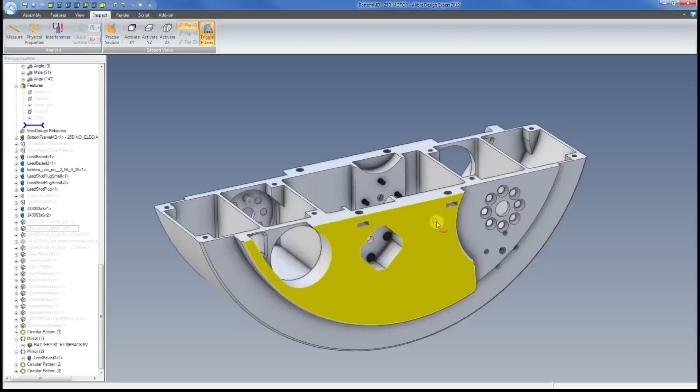This build is based on Michael Baddeley's 3D printed Dio design. I'm making tweaks and modifications of my own as I go along.

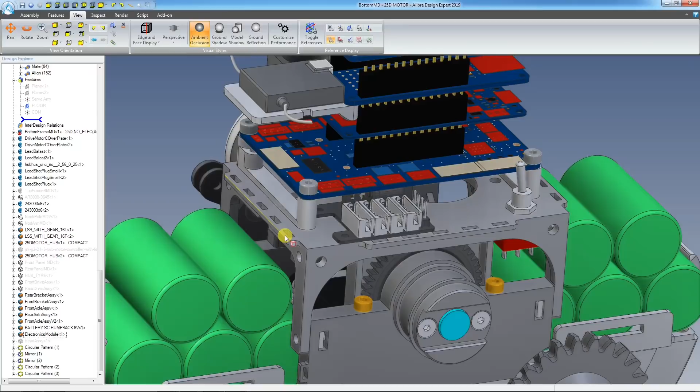So what I've been working on mostly is the deck itself. I've added all sorts of cable tie points along the sides just because I don't know my cable routing yet. I've also added this switch over here. This is a 6 amp toggle switch. I've added these little gear protectors inside. There you go, you can see that they cover the gears up so cables running through the middle there won't get pulled into them.

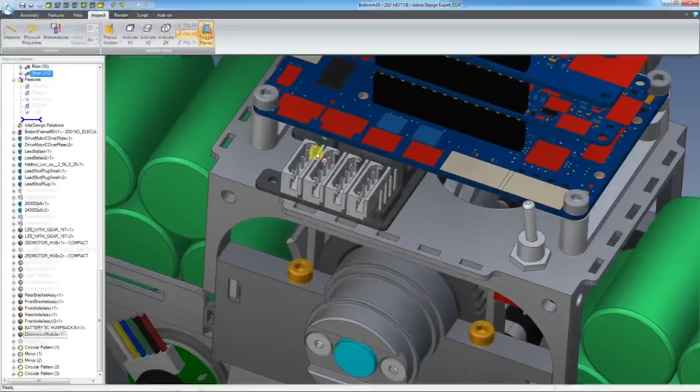This is a Lynxmotion power block, and it's basically 4 Molex connectors connected up in parallel. I don't really like these jack plugs, so I'm actually going to feed power directly from the batteries into the board, obviously via the switch. What I'm going to do is take one of them and supply power into the motor driver board, and the serial information will go up to the Arduino.

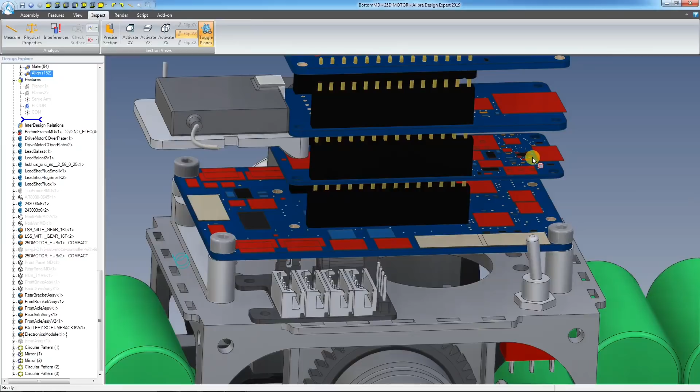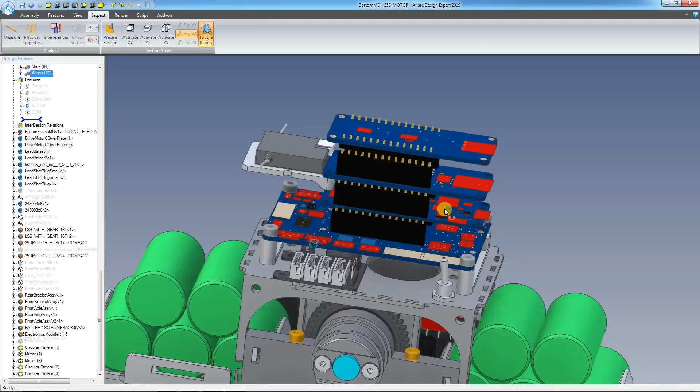2 of them at the back here will probably drive the LSS servos, which are down here. Final socket will go back down through the electronic stack here, and then down the axle, up the neck and into the head. I've made these little stands up here for the motor board to fit onto. On top of that we've got our Arduino, which is the MKR WiFi 1010 I think.

This was an SD card carrier, but I'm actually going to replace it just with a standard proto board, and that's so I can wire in like the serial data and plug in things like the Spektrum receiver, which is also serial based, which is why I made this little deck that's hanging off the side here to carry it. And then on top of that is our IMU. I have been playing around with this design down here, tweaking things as I go along, but nothing too major.

Let's take a look at this electronics deck. Here's the electronic stack carrier, and what I've got here is the battery harness here. So these basically are connected in series to take the 2 6-volt batteries into a 12-volt battery, and they're connected in series via the switch so you can power them on and off, so that breaks the circuit.

The other thing I might do is replace this jumper. I think this is a power jumper there. I might replace this with a fuse and put like an 8 amp thermal resettable fuse on there. I quite like to fuse things which have large batteries in. Here's the electronic stack in place. Everything apart from the proto board that's supposed to be sat under here.

I did fire this up the other day. This is the motor driver board. And they're designed to run off of a 3S LiPo, so that's about 11.1 volts, but they have a headroom of up to 12.6 volts. It does say that you're supposed to apply power to the board and then switch them on using this little switch. I was applying power from my PSU and switched on from the PSU, and this blew up. Now that was set at 12 volts. So I don't really see what the issue would be other than maybe a slight spike in voltage.

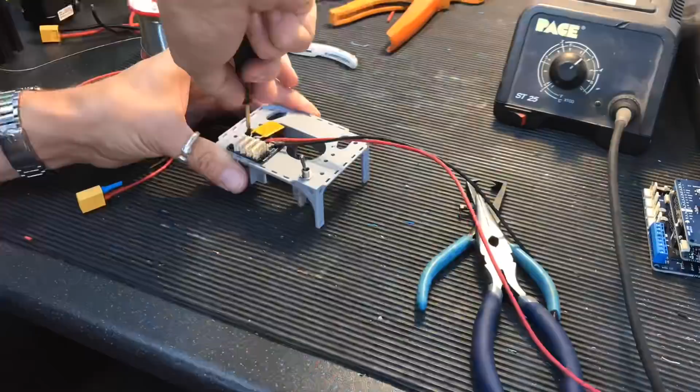It's not terribly encouraging, but the solution for me is to fit a DC-DC converter anyway, because I like to have a steady voltage. When these nickel metal hydrides come off charge, they'll be like 14 volts. That goes into the DC-DC converter, and that'll give me a steady 12 volts out. You'll notice during this series I won't be stopping to show you how to put together assemblies.

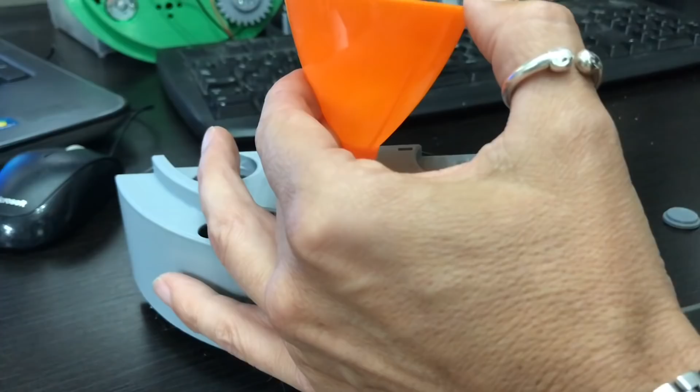I think the trip current's like 8 or 10 amps. The output of the switch harness goes into the input side of the DC-DC converter, and the output side of the DC-DC converter goes to the power distribution hub. I've reprinted this base with some of the changes that I've been making as I've been going along, and I've started to fill the lower chamber up with some lead shot.

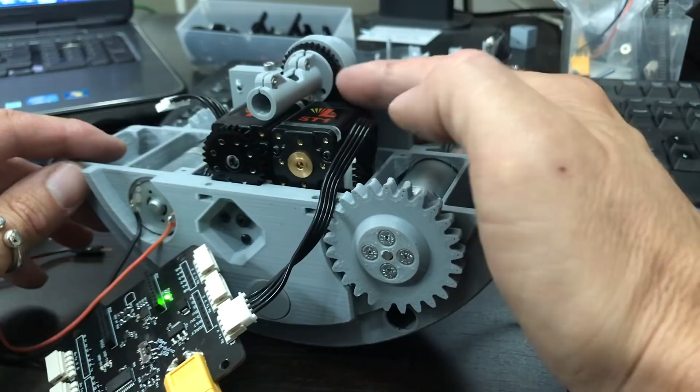While I was putting this base back together, I decided to switch out the 3:1 ratio gearbox on the Lynxmotion servo to the 1:1 ratio. So here's 45 degrees in one direction, that's pretty good, and 45 degrees in the opposite direction. Yeah, and that feels about like the speed it should be. Once that big long lever's on the end of it, I think that's pretty much spot on. So it's really handy that I could just switch that 3:1 for a 1:1 gearbox.

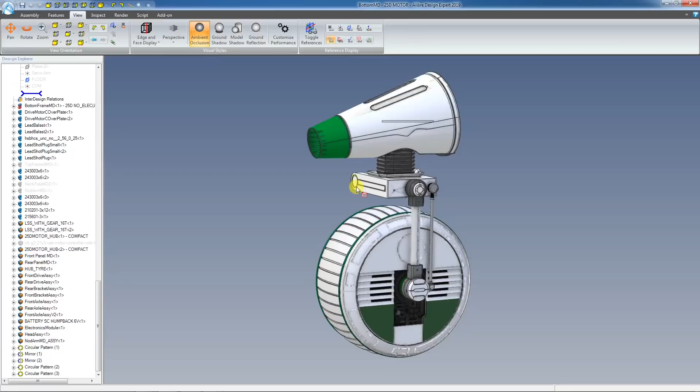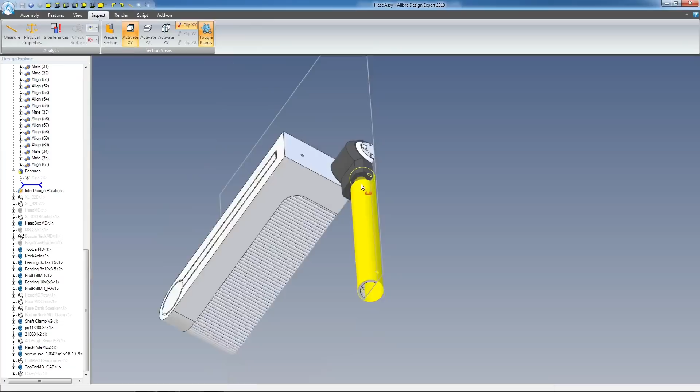Let's take a look at what I've been doing with the CAD model, and in particular the head. So you can see at the moment it's pretty much fully assembled, and I've spent quite a lot of time on the neck and head part of the model. So let's just take a closer look at that. This is the base of the head. So I've added more bearings and changed a few other bits and pieces. This is now an aluminium tube, and I found some tube which is 14mm in diameter, and I think there's a 1.5mm wall thickness. So it's pretty lightweight, but strong, of course.

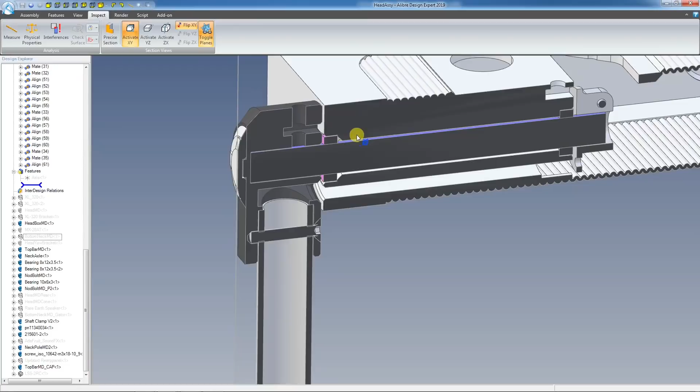I've changed quite a bit up here as well. Inside the main neck here, I've also gone again with my IGUS 8mm shaft. It's that nice hard anodized H8 IGUS axle. And then I've got a bearing at each end. So there's a bearing here and there's a bearing here. I've got a shaft clamp on the end here, and that's just to stop this from coming back out.

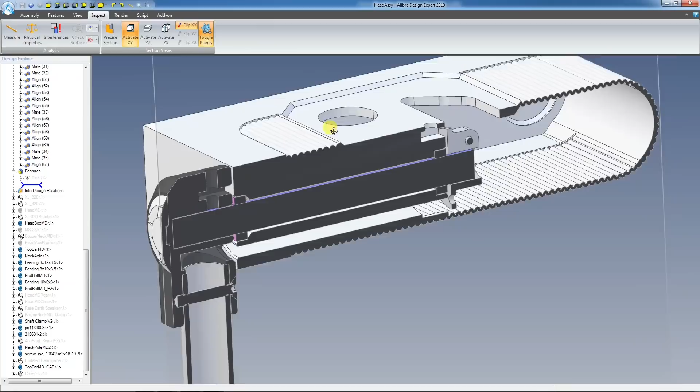Most of that head box is the same. There's a few little alterations, but not much. It's mostly to do with this part here. At the end of the neck tube where these two parts join, I have changed this part a little bit. It's just an 8mm hole for the axle to come into. I put an M3 nut in this space here, this cavity, which will have a grub screw going down just to hold on to the axle there, hold it in position.

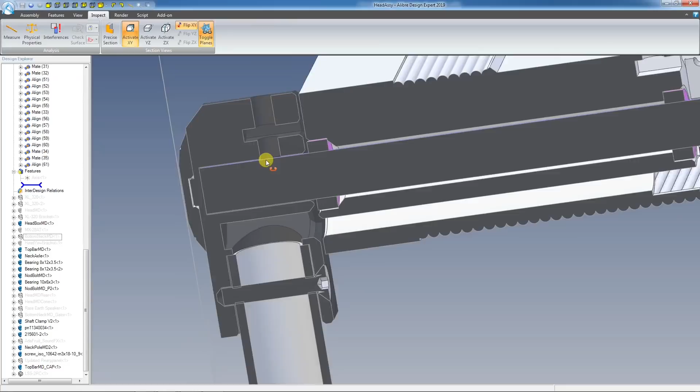I've put this M3 countersunk bolt in there, and the same arrangement will happen down the bottom here where it joins to the body. I'll show you what I do to drill these holes to get them in the right place. I make little jigs up for that, which I'll take a look at in a minute. A slot here for an M3 nut to go into. There's a bit of dressing that goes over that, so that will hide that hole.

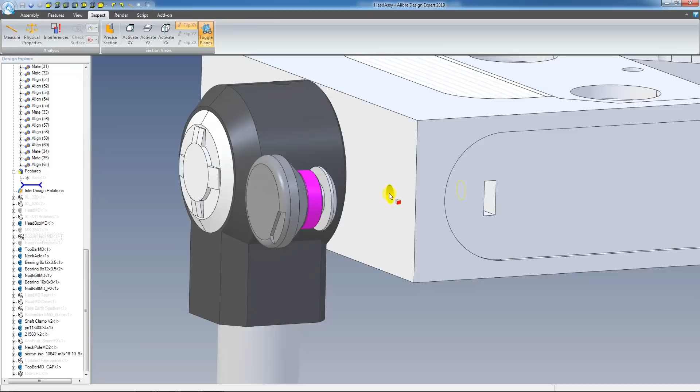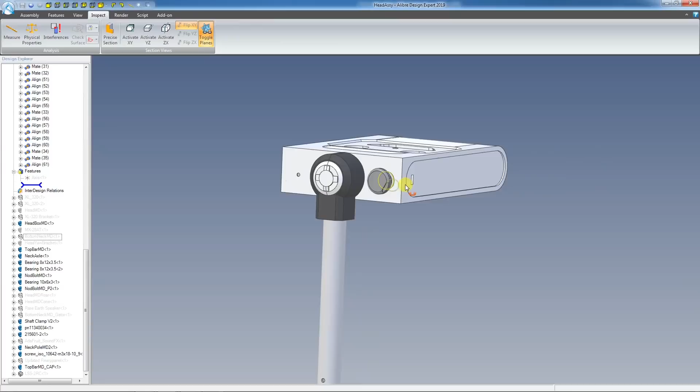And then there's a 3mm hole here, which basically takes a very long grub screw. You self tap a grub screw into the end of this part here until it touches the end. So it kind of makes a bolt out of this part, if you like. This part is printed separately, and that holds a bearing. So then that whole arrangement just gets screwed in until it touches down onto that face. And that gives you a nice bearing surface for the push rod to work on. There's that axle clamp. So that just tightens up and grips the axle and holds it in place.

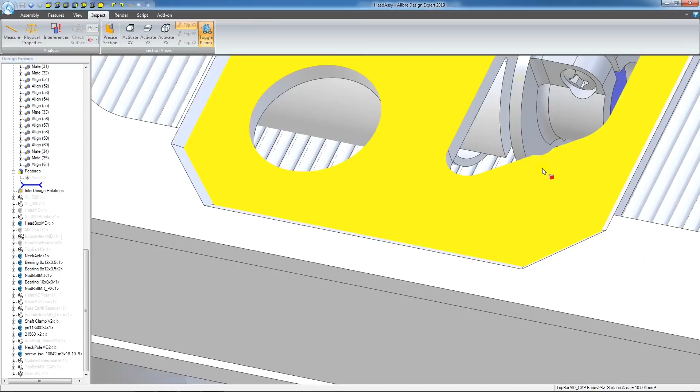The cables are going to come up through this hollow tube and then go down into this section here. You have this arrangement. So that's going to allow the cables to move in this slot, and they can just disappear out the end. They'll come out down here, and then obviously up into the neck area.

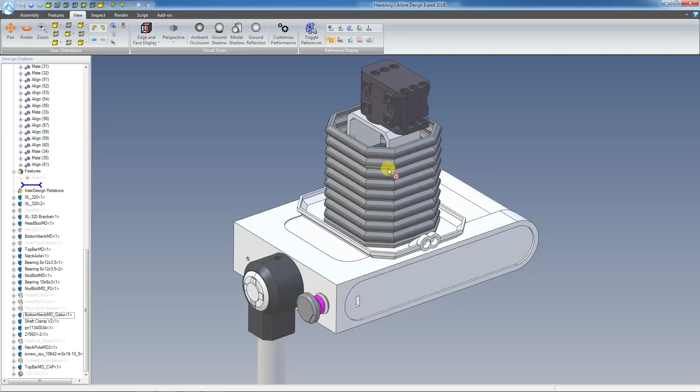Again, I'm sticking to serial protocol servos, and these are the smallest, lightest ones that I can find, and they are a Dynamixel servo. It's a 300-degree rotation, and they are super lightweight. So here's the yaw, and there's the roll. The yaw and the roll were mounted inside of this gaiter, and this is a solid part. I'm switching to make this into a soft material like Polyflex or NinjaFlex.

It just means that this can be pushed out the way a little bit if need be, although to be honest that's probably more than enough movement.

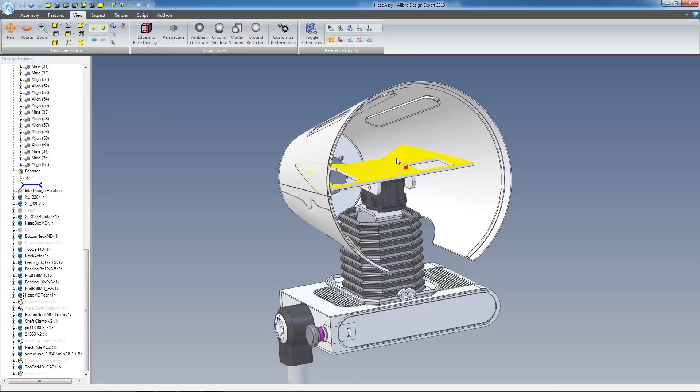So with the head, I have separated the front nose cone. Again, that's partly me being lazy because it's a different colour, so it's easier for me to print and spray up afterwards. I obviously have to change the mounting inside of here because this is totally different. I've also left room on the plate for electronics.

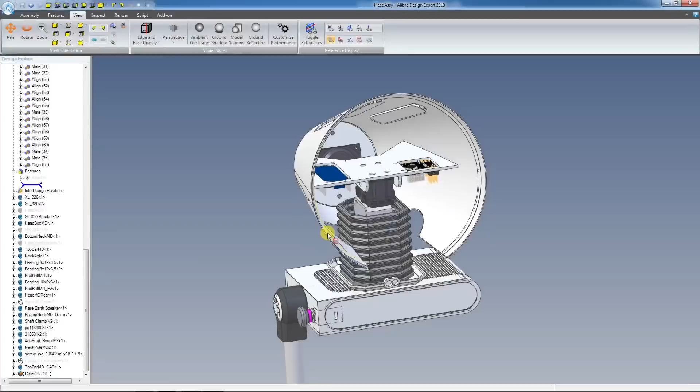An Adafruit sound module here mounted underneath so that you can get to the screws from the bottom. The speaker is going to go in the front here, so it'll project sound out of the front of the cone. This is a new module from Lynxmotion, which isn't actually out yet, but I should be getting one soon to try out. It takes serial data from the LSS bus, and it converts them to standard RC PWM outputs.

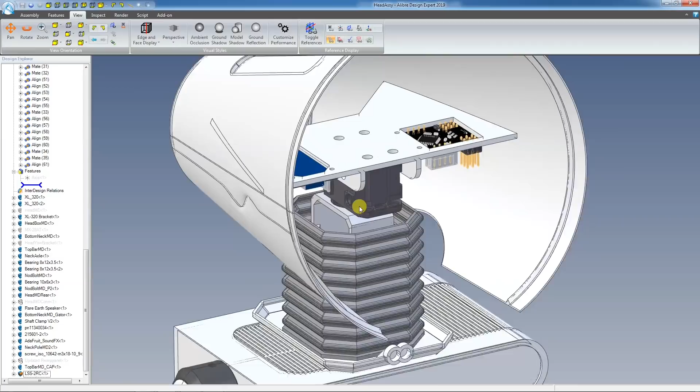I'll have the data coming up and probably going into this and then chaining on to these two Dynamixel servos, or I might have to run a separate bus for these. I'm not quite sure yet. So that's the plan with the head.

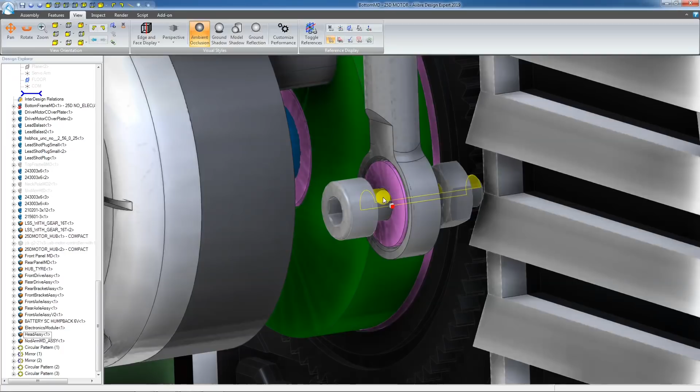It joins to the body pretty much the same way. There'll be a bolt through from the other side through this aluminium piece. You can see the two holes there. I've added more bearings down here in this part, so that's like a little M3 flange bearing. You shouldn't really run bearings onto a bolt because the bolts aren't made to go into bearings, they're the wrong size, but I'm sure it's good enough for this particular motion. Yeah, so that's pretty much it. Let's take a look at the actual model.

Well, apologies for that fan noise in the background of that CAD segment, but my Mini 2 was running in the background, and although the printer's really quiet, the electronics fan is really noisy.

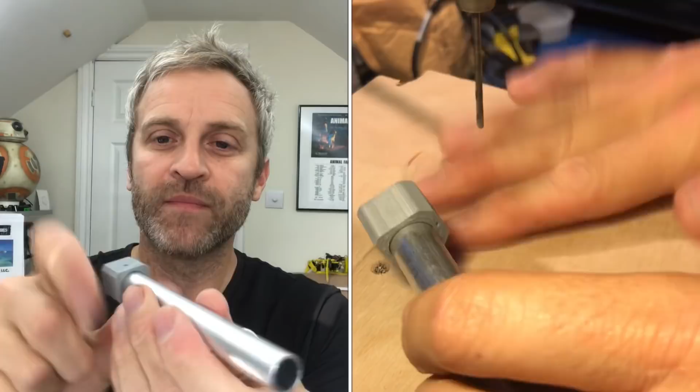Here's the model so far, and obviously the base we've already looked at, and now I'm onto this neck and the head area. So let's just look at this aluminium tube. This tube has been faced off on a lathe, so it's nice and square. What I do is just print a little block like that with a drill jig, a drill guide in it, and there's a stopper in the back there, so it'll only go so far on, so you know that the drill is going to be exactly the right place, exactly the right distance down the tube.

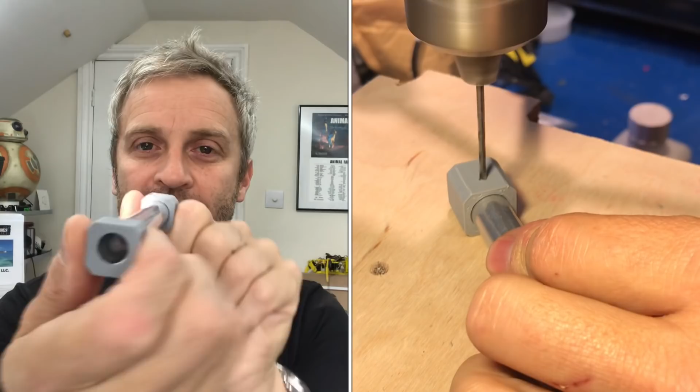I have another one on this end. Just push those on, sit them down flat on the surface so that the cubes line up, so that then both the holes are square with each other. So I drill from each side rather than drilling all the way through so the drill can't wander. After drilling, I deburr the inside of the tube with an 11.5mm drill bit and the outside with a countersink bit.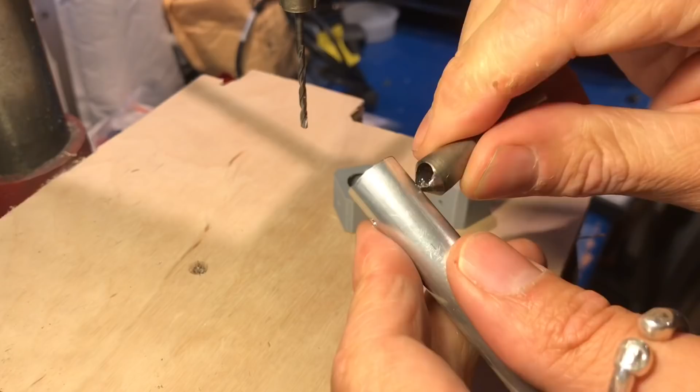If I were to put an M3 countersunk up here, it would go through an M3 hole in the tube, and then the back hole would have been tapped to M3 through a 2.5mm hole. Or you can just use a self tapper into the front hole on the tube. It's probably going to be just as good, and if you don't have the taps, it's a lot easier.

Here's the neck push rod. So I've got a bearing in the top here. This is a 10mm OD, actually it's a 6mm ID, I got that wrong in the CAD. And in the bottom here I've got a flanged bearing, 3mm ID, and I think it's 7mm OD and then an 8mm flange. This is the tiny pieces. Let's try that again.

The bolt that holds the top of the push rod to the head. This just has a 3mm hole in it, which is kind of tight in the print, and I've just wound a grub screw down into that, so it makes a bolt out of this plastic piece. And then this is the back of it, this tiny piece here. Now this piece goes through the bearing like that. The bolt goes through there, and that gets screwed into the head box, which has that captive nut inside.

Here's the neck axle. So not much to explain here. There's a captive nut down in there, and there's a grub screw down in the top, which is just biting onto that.

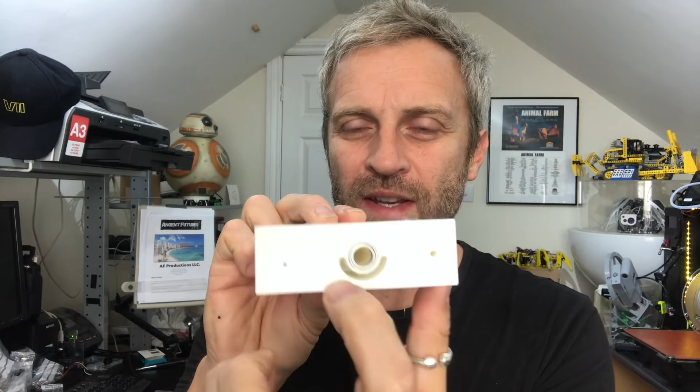That doesn't need to be hollow, it's just that I had a piece left over from when I was doing the body. The cables actually come out through there. Here's the neck box. So the cables go down through that slot and they come out at the bottom here, and of course there's a bearing there and a bearing in this end. The neck push rod joins through, and there's another captive nut in there for that grub screw to screw into.

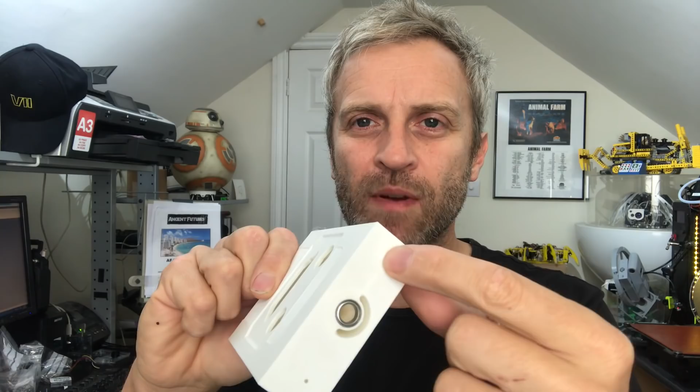The roll and the yaw axis on the head, and this plate was actually all part of a gaiter in Michael's design, and this was all solid, and the servo mounts for the roll and the yaw were all joined inside of this solid piece of gaiter. This is all one piece. I've separated them out. I'm using these Dynamixel XL320 servos. They're pretty nice, they're lightweight, and they're serial bus.

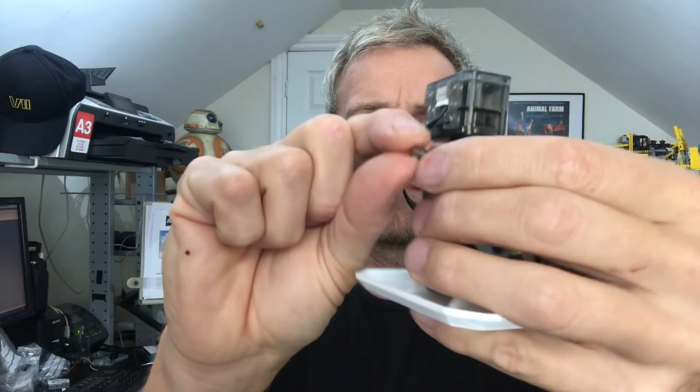They use these little kind of plastic push rivets or pop rivets to hold them in place. I'm a bit snobby about using plastic rivets. Push down to the first section like that, and then you just push the cap in and it locks it in place. And you can't get them out unless you pull that cap out first. This gaiter will go over the top of here.

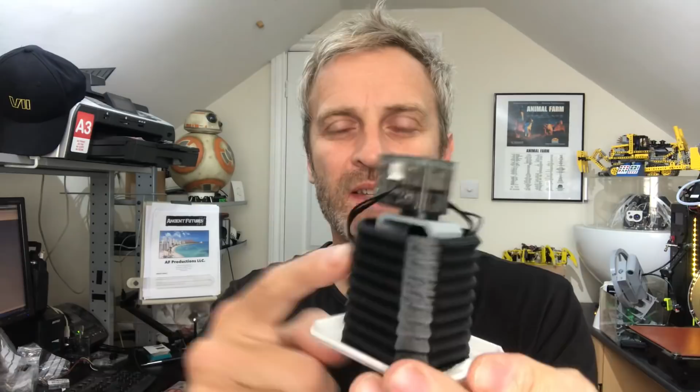This is printed in Polyflex, and what I've done to make it more flexible is I've actually only done one layer at the top. The bottom is a bit harder, it's 2 layers, and then this is 1 layer, so it's quite soft. I might try NinjaFlex, and in fact I've got some here, I know it's the wrong colour, but it is a little more flexible. So I might do it in black NinjaFlex instead. The point being is that it can just deform a little bit if this roll servo needs to push it out the way.

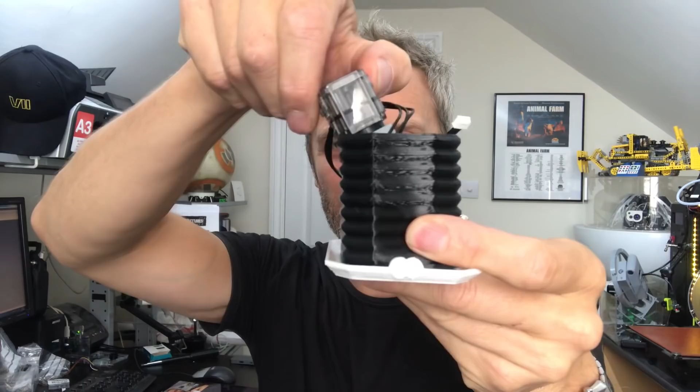And one thing I should point out is that Michael was super careful to keep all of this really lightweight, and I have been adding a fair bit of weight to it. So there's no guarantee this is going to work yet. So what I need to do now is just get some movement out of this and see if I can get some stabilization going. Before I do that, I can't really tell how much further to go with this design.

My replacement driver board has turned up for the MKR series. Firstly, I did have to upgrade the firmware on it. It was running quite an old version of firmware, and there's a firmware updater included in the example sketches. There's 2 motor drivers on board. Motor 1 and motor 2 are the lower end 3 amp driver, and motor 3 and 4 are the higher end 5 amp drivers. The processor also runs the servo outputs directly, so that also takes load off of your Arduino.

Anyway, I've got something working just to show you the difference between the closed loop and the open loop mode. I had to remove my DC-DC converter because it wasn't going to do the job, because it turns out it's a step-up converter. And what I want is more like an isolated DC-DC converter where it takes anywhere between 9 and 30 volts in and gives you 12 volts out.

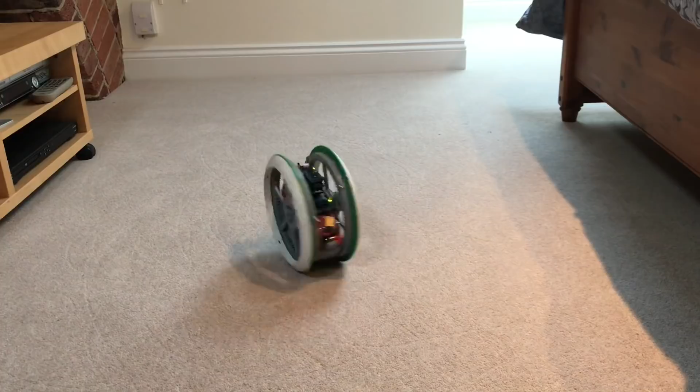So I've got the kill switch here, so I can just turn him on with that, and right now I've just got forwards and turn controls on the stick here, and there's a little bit of IMU being used to balance the body, but quite basic. This is literally my first attempt, and of course there's no tyre on it at the moment, so once I put that tyre on, I'm pretty sure it's not going to want to turn on the spot because this carpet is quite deep. Quite happy with the speed though.

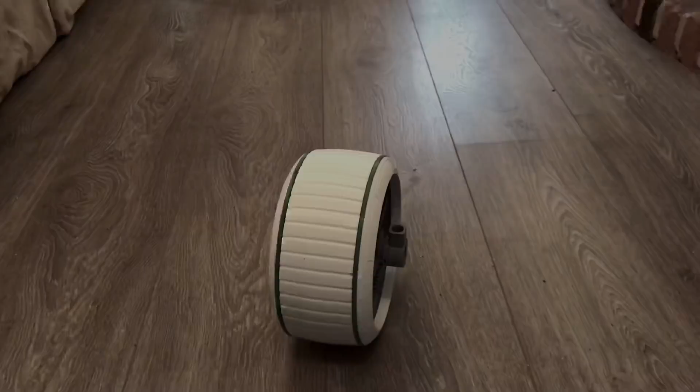Right, what have I got to sort out? Well, currently the batteries are just about impossible to get in and out without taking the wheel off, but the wheel does come off rather easily, so I'm not too worried about that. The electronics are pretty good. The over-the-air link is working really nicely, which makes it really easy to do firmware updates.

The wheel is obviously too tall here, it's causing too much friction. I might just make the green rims bigger to try it and see if that works, and see how much bigger I need to make it, so I can figure out how much smaller the tyre needs to be. I think the thing that's going to improve it a huge amount is getting those closed loop feedback motors in there, which will at least allow me to govern the speed properly of each rim.